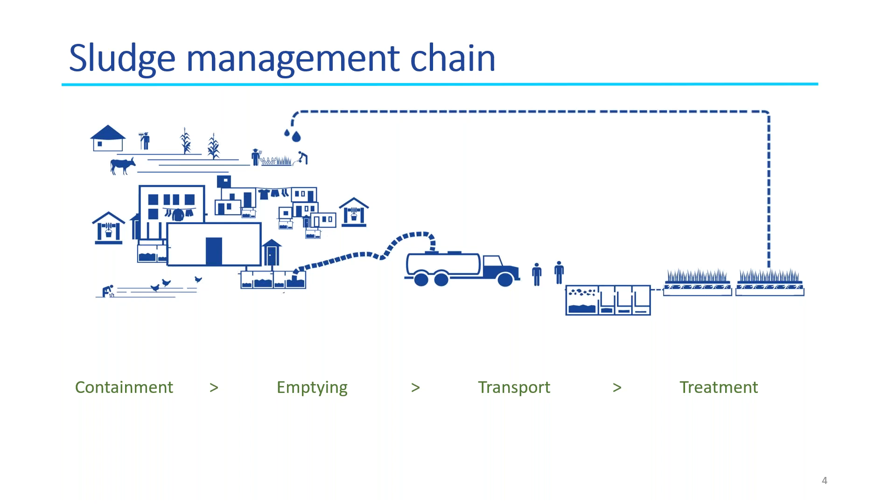The treated sludge, usually by composting or removed from the planted drying beds, can be used in agriculture, home gardening, landscaping, or other agricultural purposes. Unfortunately, in Jordan, reusing treated sludge is still not accepted due to several socio-cultural and political factors.

However, in Jordan, we have a good example of reusing sludge for biogas energy generation: the biggest wastewater treatment plant in Jordan, called As-Samra. It covers 90% of its energy demand through wastewater hydropower and biogas electricity generation.

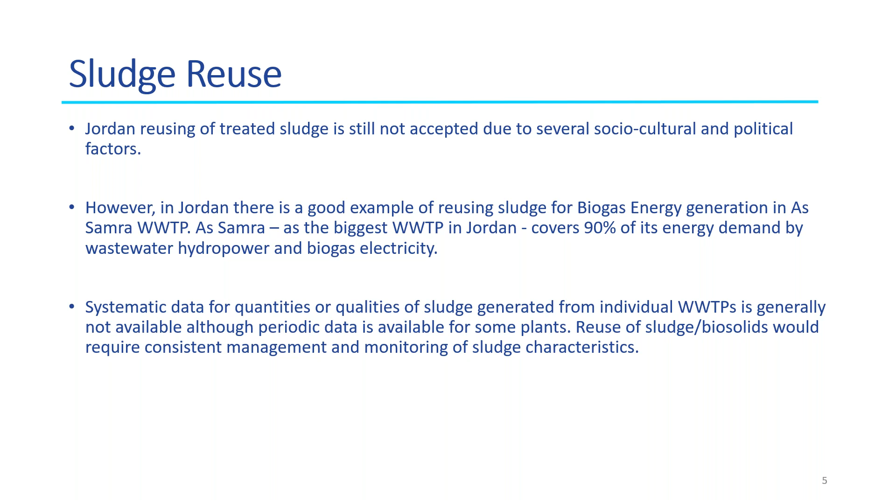Moving to the national guidelines and standards about sludge management in Jordan: according to law, the Water Authority of Jordan (WAJ) has all responsibility and authority related to water and wastewater, including operation, management, and the products of the wastewater treatment plant. Unfortunately, that law does not include a clear description of sludge reuse and disposal.

To cover that, we have technical regulations called JS 1145. It was issued in 2006 on the use of treated sludge and disposal. It regulates the entire cycle of sludge production, its reuse as a fertilizer or soil conditioner, or final disposal to landfill. That regulation classifies treated sludge into 3 categories based on quality, as shown on your screen.

In this table there are 3 classifications. Class 1 is the highest quality of treatment, usually used for fodder, fruit tree farming, or rangeland restoration. Class 2 is only suitable for use in rangeland restoration. And if your treatment falls into class 3, it's not suitable for either use, but should be landfilled.

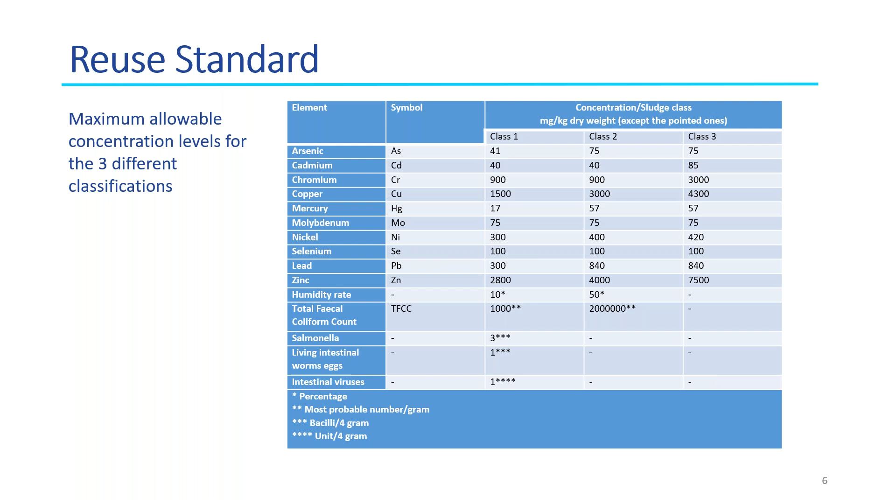So now I'm here, Anas Al-Khalaf. I will discuss with you guys about the Wadi Hassan case study. First of all, Wadi Hassan wastewater treatment plant is one of the 34 treatment plants in Jordan, and it's located near Irbid Governorate, northern Jordan.

Just a brief bit about its history: it was constructed in 2001, and it is owned by the Water Authority of Jordan and operated by the Yarmouk Water Company. Actually, the Yarmouk Water Company is responsible for operating most or all of the wastewater treatment plants in northern Jordan. The total project value for the construction at that time was $7.5 million US.

This treatment plant has a maximum hydraulic design flow capacity of 1,600 cubic meters per day and around 800 milligrams per liter for the organic load, BOD. It can serve up to 24,000 inhabitants or persons.

This treatment facility has been working for the last 17 years, and it still looks in very good shape today. If you go there for the first time, you would think it's newly constructed, and the operation is going really well. They also have a laboratory inside, so they can test the effluent on a daily or weekly basis as requested by the ministry.

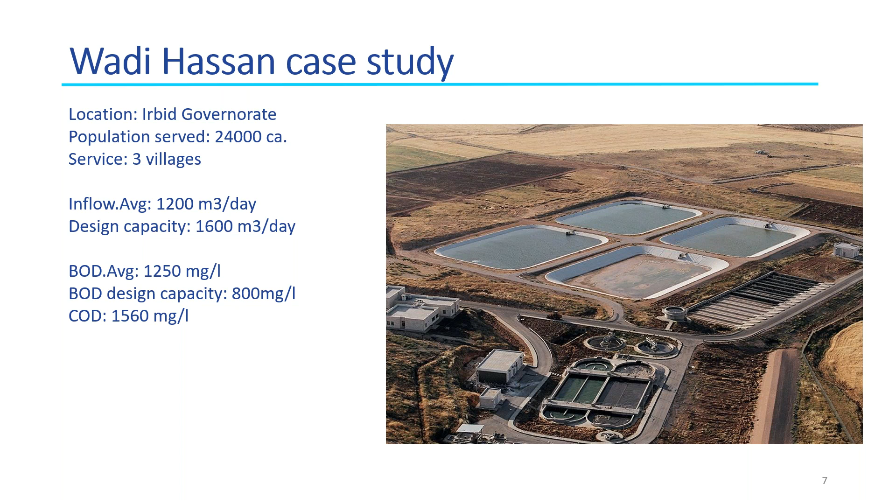Now just a brief overview of the wastewater treatment process in Wadi Hassan. It's a normal treatment technology - activated sludge. As you all know, I guess, in each wastewater treatment plant there is pre-treatment, primary treatment, secondary treatment, tertiary treatment, and sometimes a disinfection step.

So here, as you see in the flow chart, we have the pre-treatment, including mechanical screeners and grit chambers. Then the primary treatment starts, including 2 aeration tanks. After that, the secondary treatment takes place - I will not go into details, just mention it includes 2 sedimentation tanks.

Here in the secondary treatment, at the outlet we have 2 paths, as mentioned in this flow chart. The first path is for the sludge, which is transferred to the sludge thickener tank, or some people call it the holding tank.

And from there, from the sludge thickener, the sludge will be distributed to the existing sludge drying beds. And the supernatant from the thickener and the leachate from the sludge drying beds will be pumped again to the primary treatment for treatment. And the second path, for sure, is the treated wastewater, which will flow to the existing polishing ponds that were mentioned here in this photo, these big four. These are the polishing ponds in Wadi Hassan.

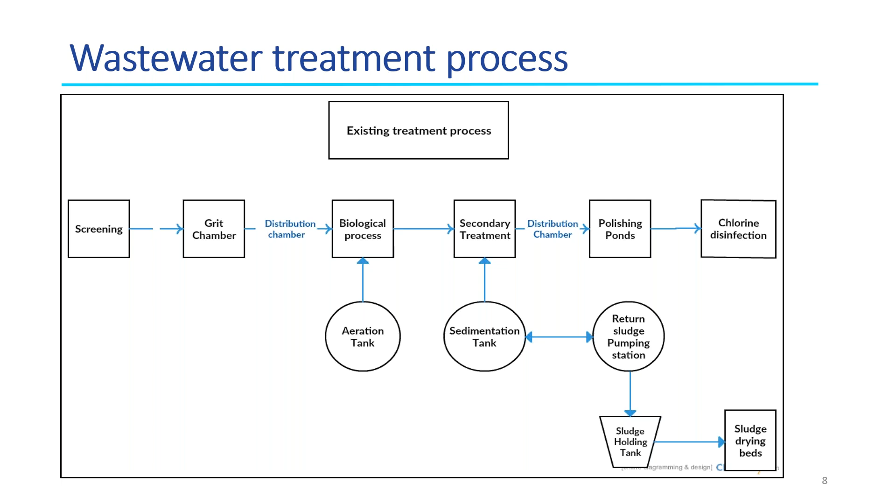So after reducing the hydraulic load, which was the problem of Wadi Hassan, the main challenge that they face now is the sludge. Currently, they have 16 unplanted drying beds, or sludge drying beds in another term. The technology is working properly during the summertime because of the hot climate. But in wintertime, due to the cold weather and rainy days, the sludge cannot be dried enough and needs to be transported in liquid form on a daily basis via tankers to the nearby dump site, which is called Al-Akaider. So sometimes they truck their liquid sludge 3 or 4 times per day, and that's really costly.

So that causes a high operational cost for Yarmouk company, as well as an environmental threat, because the Al-Akaider dump site situation is not clear, maybe till today for me. They are working on building new cells at the moment because their own cells are mostly full. So from the perspective of Yarmouk company, they need to find a solution for their liquid sludge. Also, the transport of the dried sewage sludge is a labor and energy-intensive procedure, and therefore economically not sustainable at all. So improving the sludge treatment on site will result in reduced financial burdens for the operator, Yarmouk, as well as reduced environmental pollution and associated health risks.

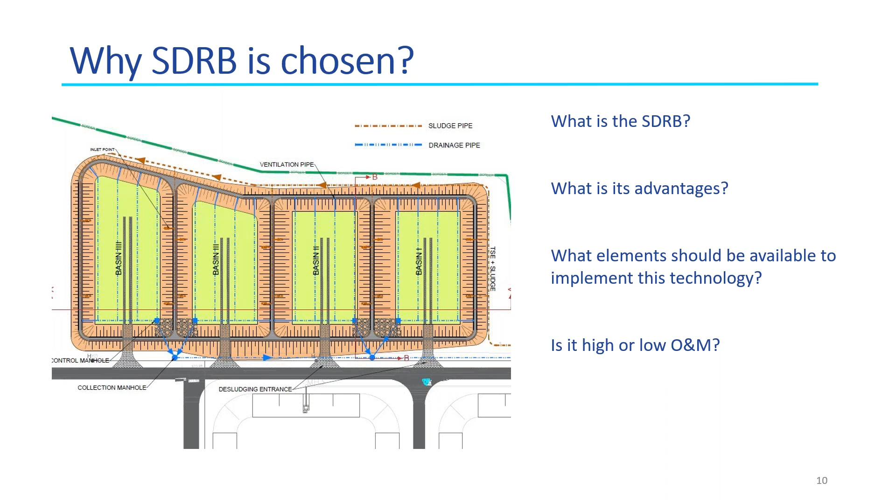For example, what we have for O&M, operation and maintenance activities, is to open and close the valves regularly as requested, check the basins, check the reeds' situation, the colors, the water distribution by eye and visually. Another one is to flush the drainage pipes from time to time, or to harvest or trim the yellow reeds or remove the dead leaves, just to make sure that the system is working efficiently at the end stage.

So that's all from my side. If you have to discuss, Mustafa, let me know. If not, let my colleague continue with the presentation of the last 2 slides. We have now only the comparison between the sludge drying reed beds and the unplanted drying beds. So let me know whether to continue or not.

Okay, thank you, Anas. Thank you very much. We'll just see if there is any clarification question from the participants. I have one from Angham Mansour. Angham, do you want to ask yourself, or I read what you wrote? Angham, if you want to talk, just raise your hand. Otherwise, I can just read what you have sent. Okay, she will talk herself. Yes, please go on, Angham.

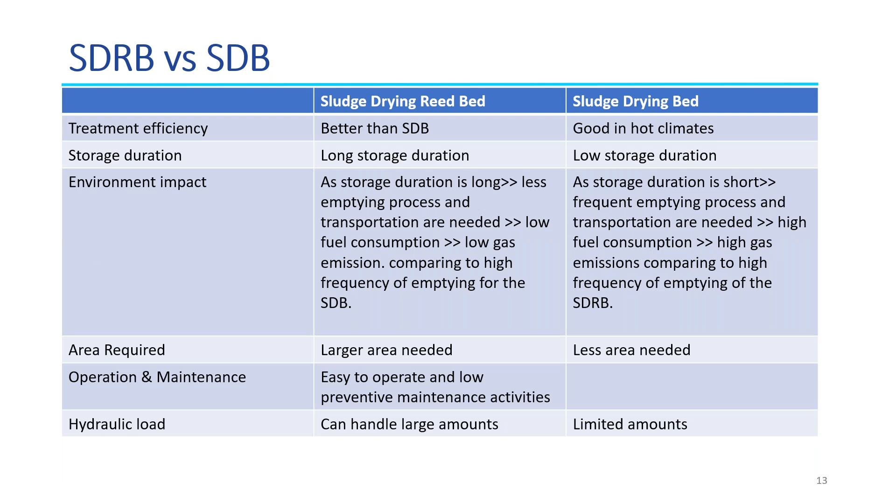From the landscaping point of view, greening and a natural view for the sludge drying reed beds compared to the other one. You can go through the table if you have more questions before ending this session.

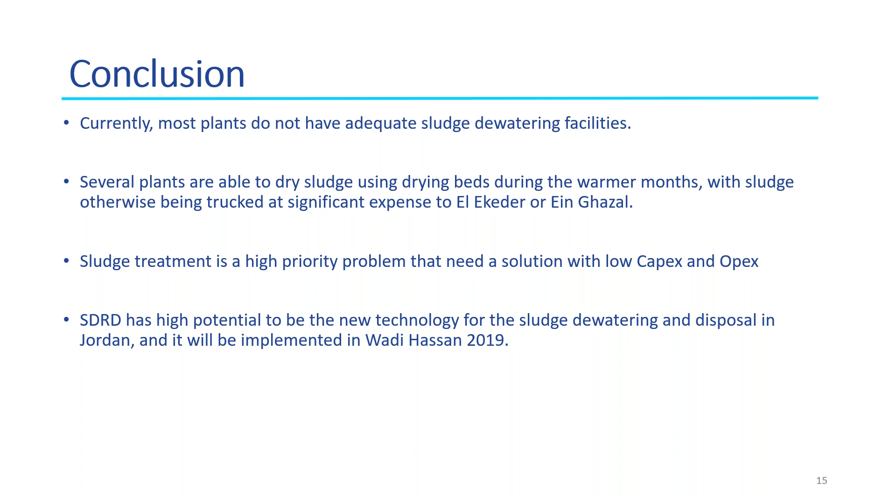Most of the further questions were sent to you by email. Actually, if I may open my email and check the questions. So maybe here. I'm not sure where it is. I sent it to you, to Dirk, actually. But yes. Okay, we have it here. Questions here. The 3 questions, and I can publish them if you want me to.

Yeah, sure. One by one. Yeah, okay. First, start with... Mustafa, go ahead. Yeah, we can go first with the first poll question, the first survey. The first survey is: from your knowledge, what are the current sludge management practices in Jordan? Our colleagues gave 3 options, and participants are, as always, asked to give their opinion by clicking one of the 3 options.

Okay, from your knowledge, what is the situation now? Anas, please mute your mic. Please, we can hear a lot of noise. Did I forget someone? No, I think no one.

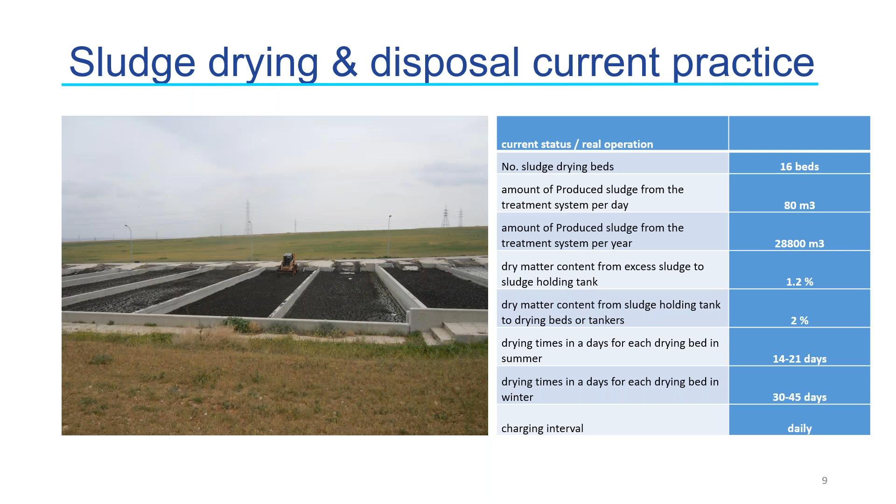The question is, if you were a decision maker, would you go for sludge drying reed bed or sludge drying bed? Two options, yes or no. As a sludge drying bed or sludge drying reed bed? Maybe that was a mistake. So A is not yes, A is sludge drying reed bed, and B is sludge drying bed. Sorry, that was a typing mistake. What was clear from what you sent us, and it's also clear that participants gave their answer, is that they're saying this is a feasible option, either sludge drying reed bed or sludge drying bed, with almost 90%.

So we can close this and share the results. Almost 86% are saying yes, this is a feasible option, and only 14% are saying no.

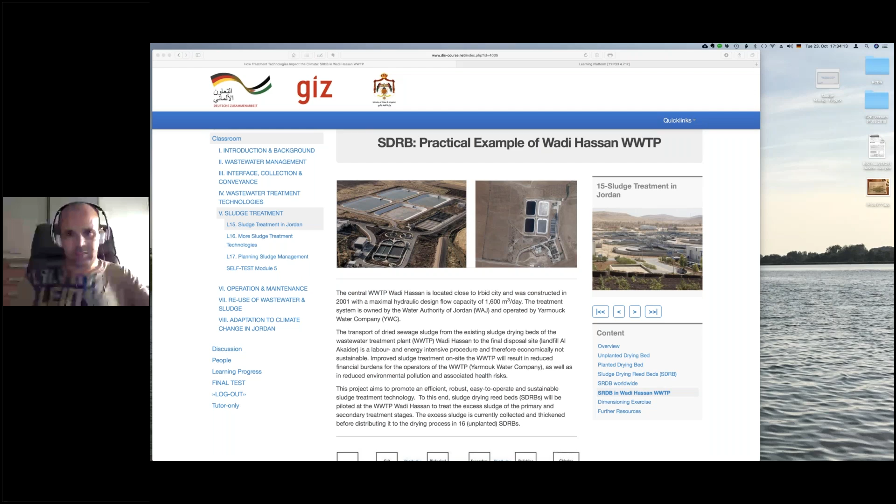Thank you very much. Perhaps we can take one really last comment from Razgar. I did not introduce myself last time, so I'm Razgar, independent consultant at UNDP projects. My question: do the speakers think incineration of sludge would be an option in Jordan for the future, maybe in the cement plant? One of the legislations from the Ministry of Municipality allows wastewater treatment plants to dispose of sludge as long as the dry matter content reaches not less than 90%. When it's 90%, this means it's a very good fuel for incineration. So what do the speakers think about an incineration plant in Jordan?

Hi Razgar, I think we are aiming, from our perspective, to have low capex and opex solutions. As you know, Jordan is not a rich country in money, so we are looking for low capex. As far as I know, incineration is pretty good and for sure very efficient, but it needs a lot of capex and opex. That's what I know, but if you know something else, let me know. So what do you think?